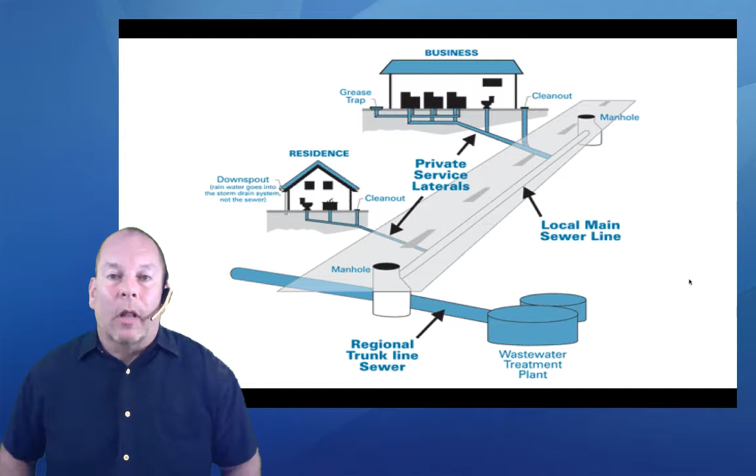So with that in mind, let's go ahead and jump in. I'm going to use a few terms today, and I want to make sure we're all on the same page with how I use those terms.

If you have a sewer overflow out of a manhole or similar structure in your collection system, there is a federal prohibition against the discharge of any volume of untreated or partially treated sewage. So if we have an SSO, regardless of volume, we have to report it to the state, and we run the risk of some regulatory liability.

Now, similarly, if we have a problem in our collection system and it results in a backup into a home or business or other types of private property, again, this is a violation of the Clean Water Act. This is an SSO, and we need to report it to the state. So once again, we have some regulatory liability.

Now, what makes sewer backups different, though, is if you damage private property as a result of a sewer backup, you're going to be facing some civil liability. You're going to be looking down the wrong end of an insurance claim. So for sewer backups, we face both regulatory and civil liability, and for the run-of-the-mill SSOs that don't impact private property, we still have to be aware of the regulatory liability that carries.

Now, sewer overflows and backups, they differ in where they come out, but they do share a few things in common, primarily the potential to cost a lot of money. And by the way, the photo on the right, that is a pump station, and the water you see pooled on the ground, that is not rainwater.

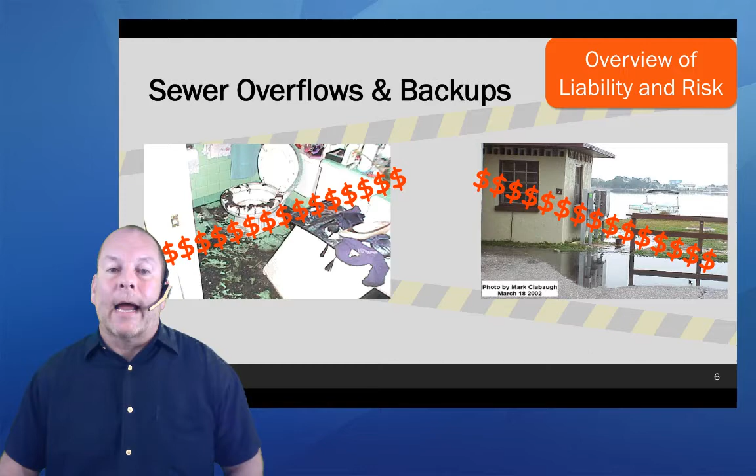Now, when you ask yourself who might be interested in an incident like that, the usual players come to mind: the regional board, perhaps the state water board, Fish and Wildlife, county environmental health. But there are some other groups that we need to be aware of as well that are keenly interested in our sewer overflows and our sewer backups.

And in particular, if you look in the background of that photo, you're going to see some businesses on that body of water. Now, it's safe to assume those businesses cater to tourists. And if we have a sewage spill impacting that surface water body, we're going to be posting signs. And these signs could theoretically drive the tourists away. And those businesses catering to tourists are not going to be very happy with us.

And it's not uncommon for businesses to file a claim against your organization under a theory called business interruption expenses. In other words, you cost them business, and they're going to file a claim against you to try to recover the lost revenue. Now, in addition to private interested parties, we also have to be aware that our sewer overflows and backups, these are very good news stories.

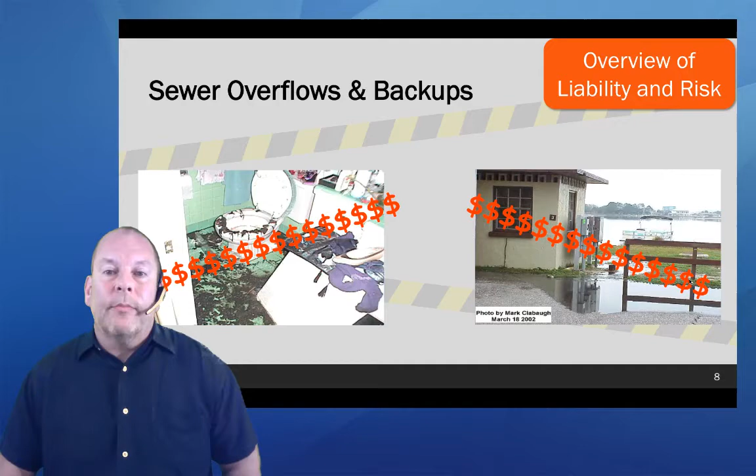Now that raises the question: how do private environmental groups get the ability to sue you for your sewer spills? We need to look to the Federal Clean Water Act. As I mentioned before, there is a prohibition against the discharge of untreated and partially treated sewage of any volume. In the Clean Water Act, there is a provision known as the citizen suit provision, and in a nutshell, the way it works is this.

Now, in Northern California, we have a couple of groups that are very active. Baykeeper gets a lot of press, but there is an organization based out of Northern California that over the past several years has proven themselves to be very litigious: Riverwatch. This organization is based out of Northern California, but they currently have active litigation going on against cities and special districts in Southern California, as far south as San Diego as well.

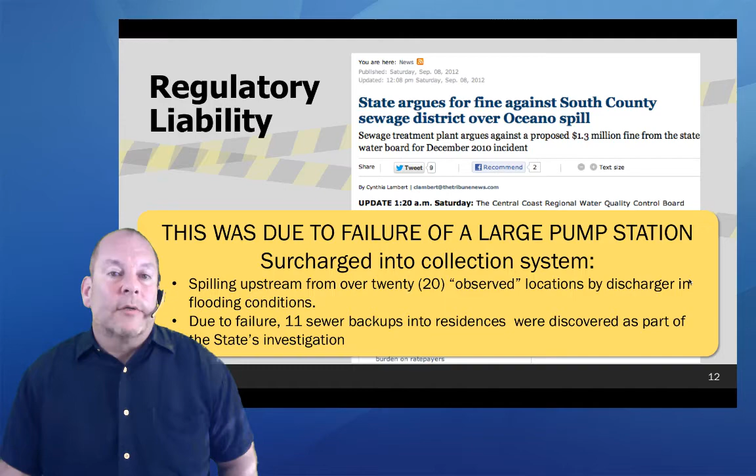And they surcharged their collection system. They had 20 observed SSOs, and they flooded 11 homes. This was what you might consider a very bad day for them. Now, this got the attention of the regional board as well as the state water board. And the district, as their defense, raised the act of God defense, that this storm was so big, so bad, there was nothing the district could have done to prepare for it.

And this gives us great insight into the thinking of the Office of Enforcement on the act of God defense. In this quote, we see that the senior staff counsel for the State Water Board's Office of Enforcement argued that the district had years to properly budget funds for projects to address known problems. As a direct quote, delayed maintenance issues are not acts of God. There were several unresolved issues that were known about and should have been repaired prior to the spill. So the act of God defense in this particular case did not work, and enforcement proceeded.

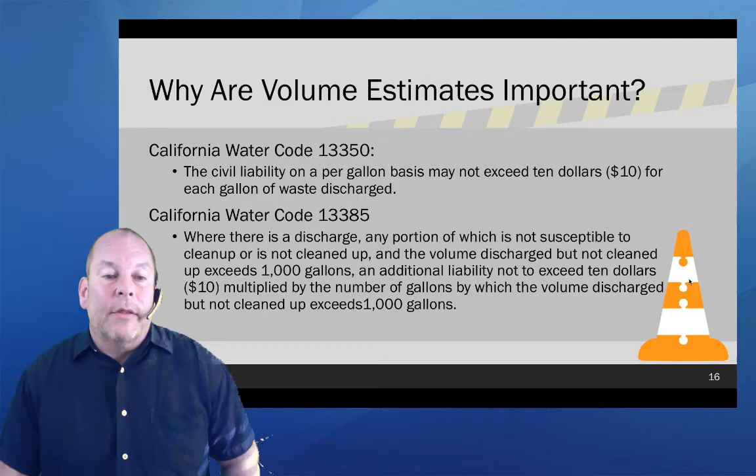The other thing to keep in mind if enforcement action is going to be taken against us, in addition to economic advantage, is SSO volume spilled. There are two places in the California Water Code that assign a dollar value of $10 per gallon of untreated or partially treated sewage spilled. Hopefully, in negotiations with enforcement staff, you can negotiate downward, but nevertheless, we are facing $10 per gallon right out of the gate.

This underscores the importance of having defensible volume estimates, as this particular case study illustrates. Enforcement action proceeded against this district, and at the end of the day, the State Water Board and the Central Coast Regional Board levied a fine against the district of $1.1 million. In the grand scheme of things, not a tremendous amount of money, but in terms of their annual operating budget, this accounts for a little more than 50%. This was a hefty fine, and it really hurt.

The key issue in this enforcement action was vast differences in the estimated volumes of the spill between the State Water Board engineers and the district. The district had reported to the state they spilled 400,000 gallons. The State Water Board engineers, however, through their calculations, estimated the volume was closer to 3 million gallons. Again, at $10 per gallon, we're talking serious differences in dollars. This underscores the need to have defensible, documented SSO volume estimates.

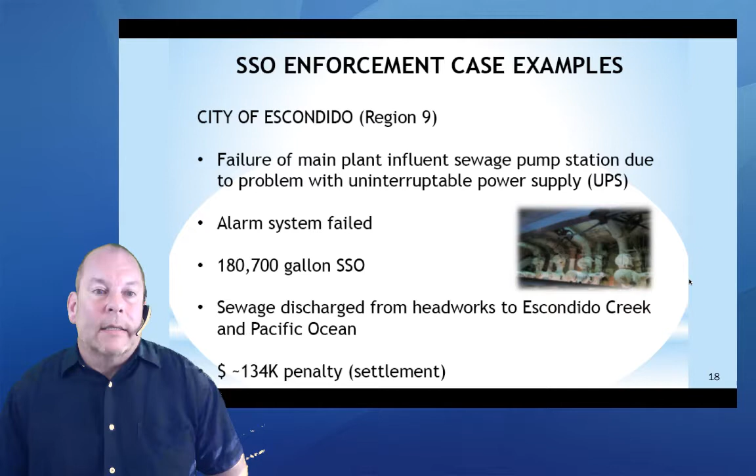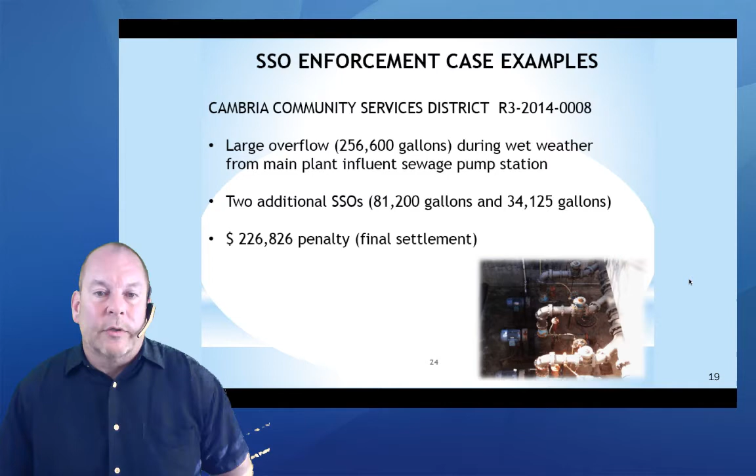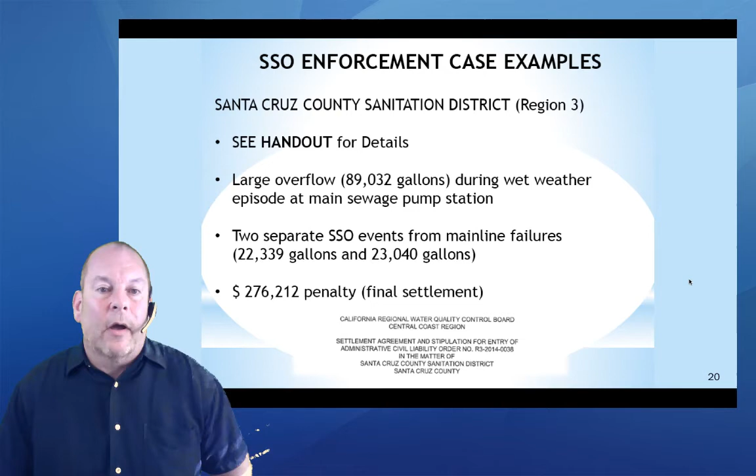Now let's go into a few SSO enforcement case examples that directly involved failed pump stations. City of Escondido: failure of a main plant influent pump station, $134,000 penalty. Cambria Community Services District: overflow of 257,000 gallons, again due to failure of an influent plant sewage pump station, $227,000 penalty. Santa Cruz County Sanitation District: 89,000 gallons spilled, again due to failure of a large sewer pump station, $276,000 fine. Costa Mesa Sanitary District: a $416,000 penalty assessed, and again this involved failed pump stations.

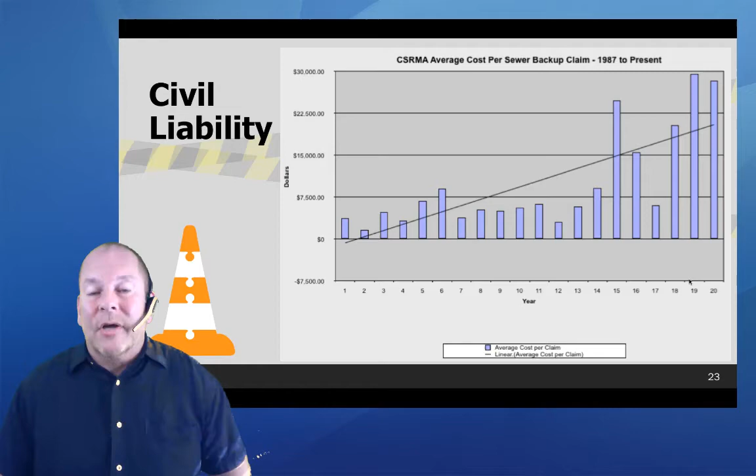So let's switch gears from regulatory liability and hit some key issues on civil liability real quick before getting into what we need to start thinking about in emergency planning for our pump stations. This is the average cost of a sewer backup impacting a single-family home in California. Don't get too hung up on the numbers. The takeaway is that about 25 years ago, the average cost was running around $4,000 per incident. The average cost now statewide is running closer to $26,000 to $27,000 a hit. There are a lot of reasons for this that I'm not going to get into today. The takeaway is simply that they cost a lot of money.

In this particular case, we had a sub-regional pump station, a very large pump station that failed one night due to a large storm and a power outage. While this pump station was equipped with a backup generator on site, the computer controller for the generator failed, and as a result the pump station was non-operational. In this incident, we had over 100 homes and businesses impacted by this failed pump station. The potential loss exposure, in other words the potential dollar value of all of those damaged homes and businesses, was pegged at $70 million.

As you can see, when a pump station fails, depending where it is and what it serves, it can result in some really significant damages, both to private property and your customers, as well as in real dollars. In this particular case, there ended up to be 265 plaintiffs, representing over 100 damaged homes and businesses.

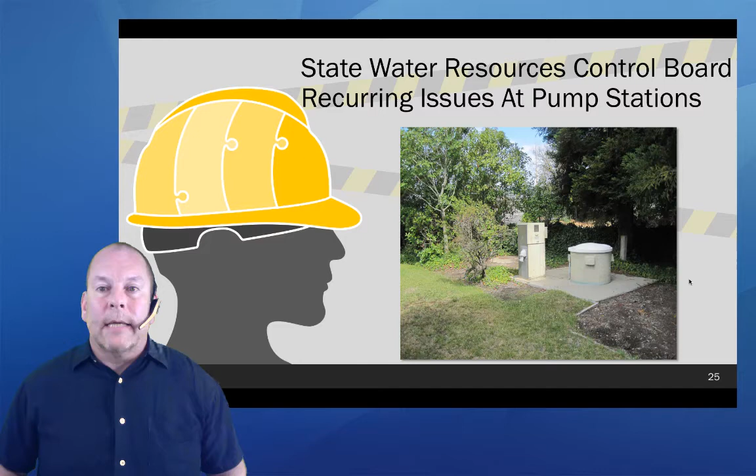Let's talk about what the State Water Board enforcement personnel keep seeing during their SSMP audits related to pump stations. Hopefully we can take away some lessons here and make sure we've got our ducks in a row before the State Water Board visits us and finds the same things.

Something to keep in mind is during an SSMP audit, your pump stations are almost always going to get a visit. These are structures that the State Water Board is very interested in. If you want to see completed actual SSMP inspection reports, you can find them on the State Water Board's website, or email Jim Fischer at the Water Boards. He welcomes your emails, and he looks at this as an opportunity for everyone to learn.

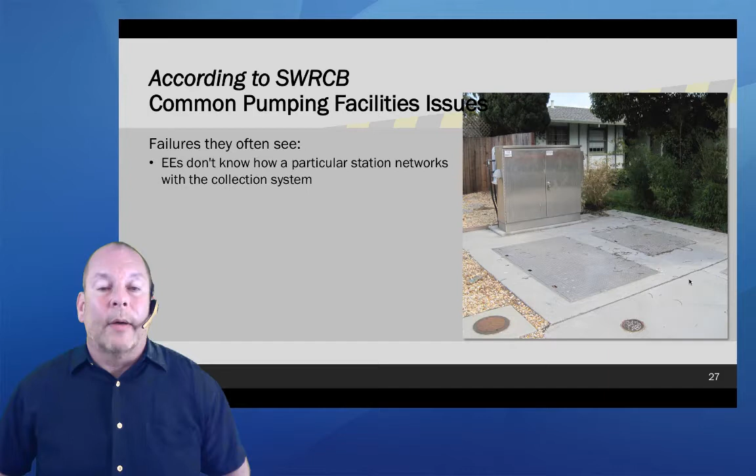So some common pump station issues that they see: employees don't know how a particular station networks with the surrounding collection system. As we all know, this is very important because we can use our system as a holding basin, if we will, when we have a pump station fail, to buy us time before we actually see an overflow.

Also, access to critical replacement parts, emergency repair resources, whether or not an agency has the adequate resources to respond to a station failure. Knowledge of the local low point, or in other words, when a pump station fails, where in your system is it actually going to overflow, so that we can get out there ahead of time.

And related to that, once we know where a station is going to overflow, the State Water Board wants to make sure that your staff is aware of where all the local storm structures are, so they can get there and protect them, hopefully, before they're impacted, or at least mitigate the impacts should they arrive after the fact.

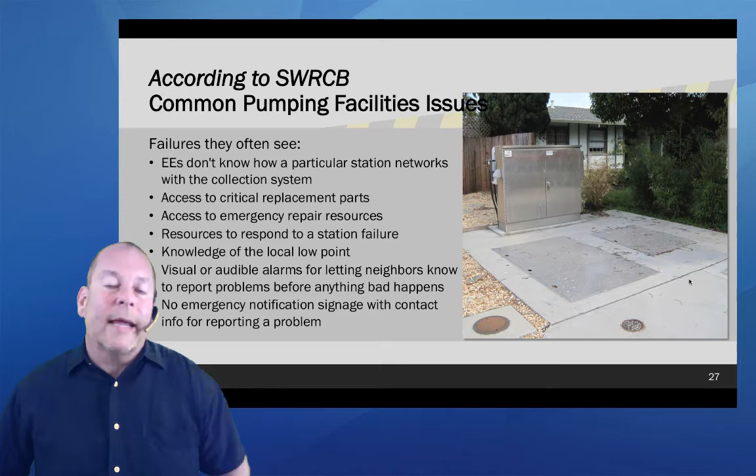Another thing that the State Water Board is keen on is making sure that pump stations are equipped with signage or other form of alarms that will notify surrounding neighbors, if that is applicable, so that they can alert you when problems come up. So let's address a few of these issues.

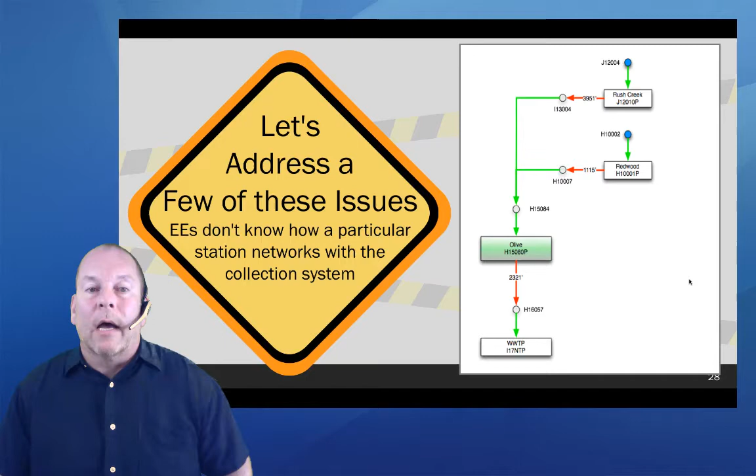First and foremost, employees don't know how a particular station networks with the surrounding collection system. What you see here is a line diagram from a sample pump station emergency response plan. We got rid of all of the sewer lines, and now what we're just showing are the pump stations and the direction of flow. This allows an employee to quickly determine where they can go in their collection system to shut off pumps and start using holding times in our wet wells to buy us time to deal with the failed pump station.

More on that later. Access to emergency repair resources: if you have already identified which vendors have the resources and expertise to help you out should it become necessary, make sure it's written down and your employees have access to that and know how to obtain those resources under emergency circumstances.

Next, having visual or audible alarms to let neighbors know to report problems, and emergency signage. It's a simple matter to make sure that we have visible signs with a phone number for neighbors to alert us when they notice a problem, whether it's vandalism or just something not right.

In this particular case, CSRMA has actually had a couple of claims in the past 3 years where the high-level alarms on a pump station failed. And so the agency was not aware of a problem at the pump station. They only became aware when neighbors noticed something wasn't right, and they notified the agency.

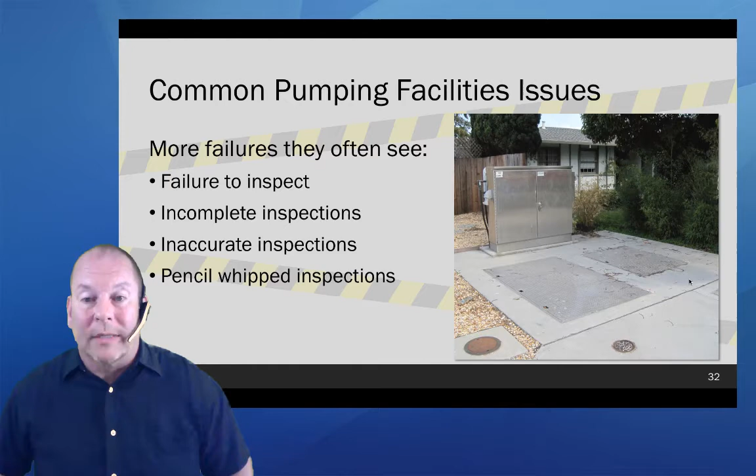Incomplete inspections, inaccurate inspections, and pencil-whipped inspections. Let's talk a little bit more about that. First, the State Water Board does not like seeing pencil-whipped inspections, just like the CHP for your heavy vehicles. They want to see documentation that indicates whoever performed the inspection took it seriously.

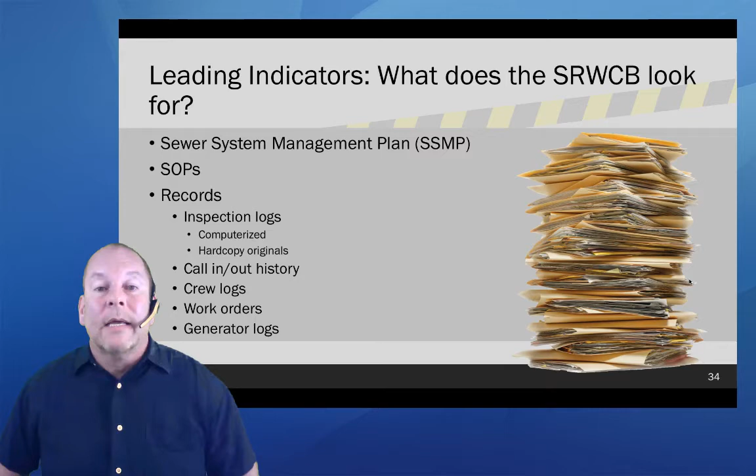Additionally, what does the State Water Board like to look at in addition to your pump stations? Well, obviously they're going to take a look at your SSMP, but they're also going to be asking for your standard operating procedures. More on that as we go forward. Also, records, inspection logs, whether they're computerized, and your hard copy originals. Call in, call out history, crew logs, work orders, generator logs. This is just a sampling of some of the documentation they'll be looking for.

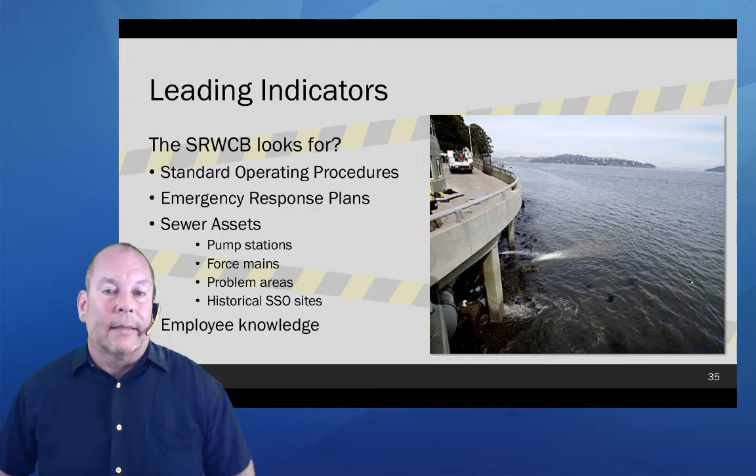Let's talk a little bit more about what the State Water Board is looking for in standard operating procedures as well as your emergency response plans. They're going to be looking for evidence of routine wet well inspection and maintenance.

The State Water Board staff like to relay a story where they were conducting an inspection. They were at a pump station, and they asked the staff member who was escorting them how often they open the wet well and take a look. Staff indicated, oh, we do this every time we're out here. The State Water Board staff was very pleased to hear this, and when they asked staff to open up the wet well so they could take a look, the bolts holding the hatch to the wet well in place had rusted in place and they couldn't get it open.

This, as you might imagine, caused the State Water Board staff to lose faith and the agency staff to lose credibility. So when we are doing our pump station inspections, in particular with the wet wells, here's a tip: take photos, and if they're date and time stamped, even better. This provides the State Water Board staff evidence that we are in fact looking at these things, and it also gives your organization an opportunity to see subtle changes that are occurring over time that an employee may miss from week to week.

Now, they will also be asking your staff lots of questions to test their knowledge of your standard operating procedures, your maintenance procedures, and your emergency response procedures. The questions that they're going to be asked aren't a big secret. The State Water Board, as well as the CWEA, put out a list of the common questions you can expect the State Water Board staff to be asking your staff during an SSMP audit. If you'd like a copy of this, please drop me an email at the conclusion of today's webinar.

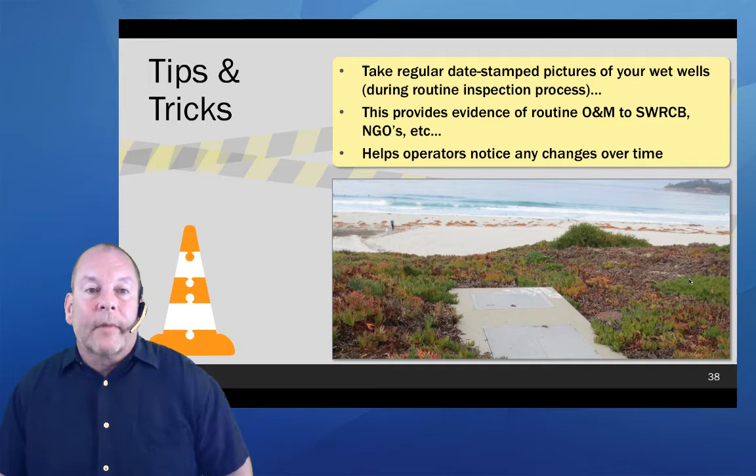So here's some tips and tricks. We already talked about taking regular date stamped time pictures of your wet wells during your routine inspections, and also with your SOPs. Another tip: make sure, one, you have them, and two, make sure they're in an area where your employees have access to them where they would need them.

If you have wonderful, beautiful SOPs that live in binders on a shelf back at the main office, but where staff would really need to be referring to them is at a pump station, get a copy out to the pump station. This is something the State Water Board likes to see.

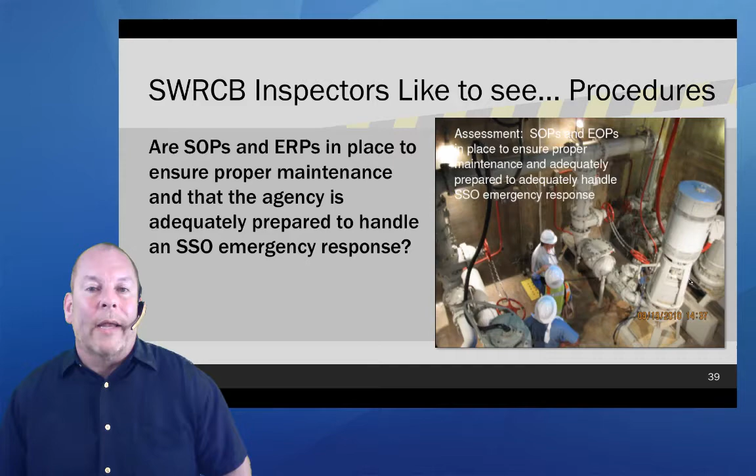So the State Water Board will be looking for your SOPs and emergency response plans in place to make sure you have them, but also that they're available and accessible to your employees when and where they would likely need them. Now this brings up a question.

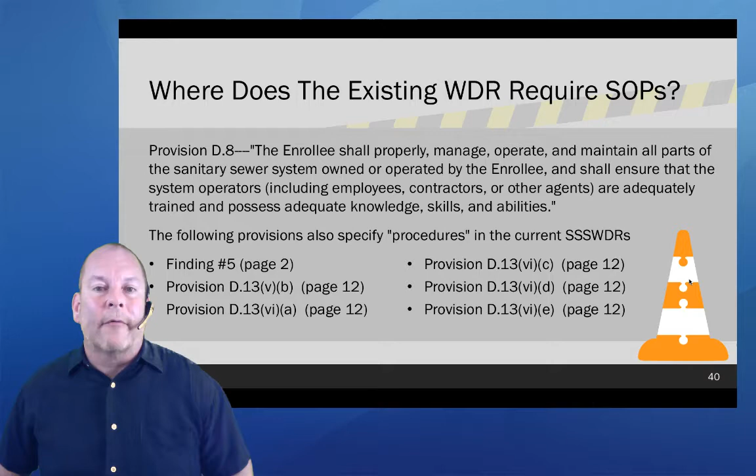Where does the existing waste discharge requirement, the order where we get the SSMP requirements, where does it require us to have SOPs? Well, when this question was posed to the State Water Board Office of Enforcement, this was their response: they use provision D8 in the order as their interpretation of requiring SOPs. This is where during an SSMP audit, they will use section D8 to ding dischargers for failure to have the necessary standard operating procedures. Now, standard operating procedures, as we know, all of them are not created equal.

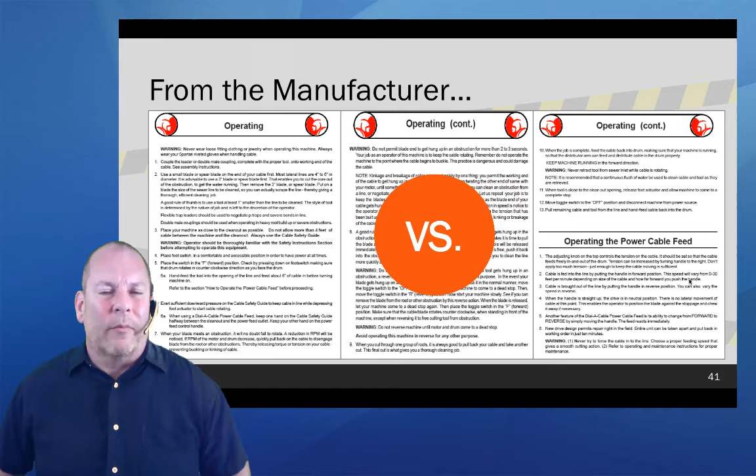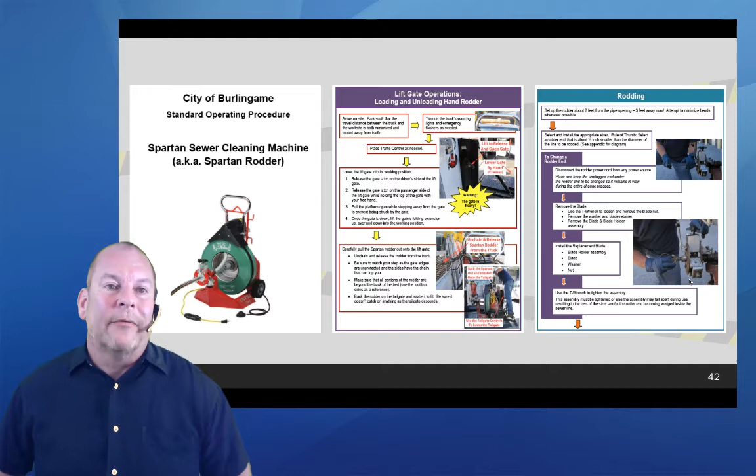So what Burlingame decided to do was develop their own operating SOP for how they wanted the Spartan sewer cleaning machine operated at the City of Burlingame. What they did is put together a photo-based SOP that's very easy to follow, and as we all know, a picture is worth a thousand words. This is zip tied to the unit, so you cannot take the unit out to the field without bringing the SOP along with it. This makes sure the SOP is conveniently accessible to employees when and where they would need it the most.

Over the past several years, especially during the recession when we saw a lot of folks retiring, a lot of organizations started getting their SOPs written. Not only for regulatory reasons, but with retirements, a lot of institutional knowledge was perhaps walking out the door. In many cases, organizations wanted to capture that knowledge so they would have a tool to train new employees and a standard to which they could hold employees accountable going forward.

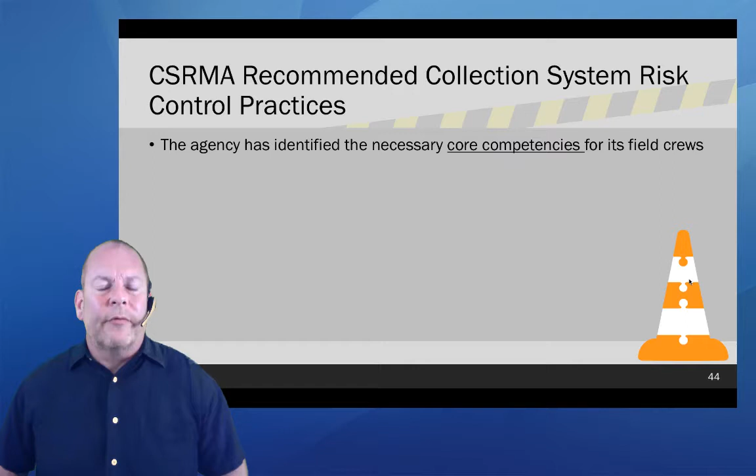Now, CSRMA, let's talk a little bit about what they recommend, because it ties directly in with the State Water Board's expectations, in particular for SOPs. One of the things CSRMA recommends to all of their members is that you've identified the necessary core competencies for your staff. What do they need to know to be successful at their job? It's going to be different for every agency, but we do have some commonalities. We all do line cleaning, perhaps point repair, bypass pumping, etc.

Once you've identified all the necessary core competencies, the things your employees must know how to do, these things become important enough to have written SOPs behind them. If it's important enough to be a core competency, we need to have a written SOP, not only for training, but also to be able to determine what good looks like, what success looks like.

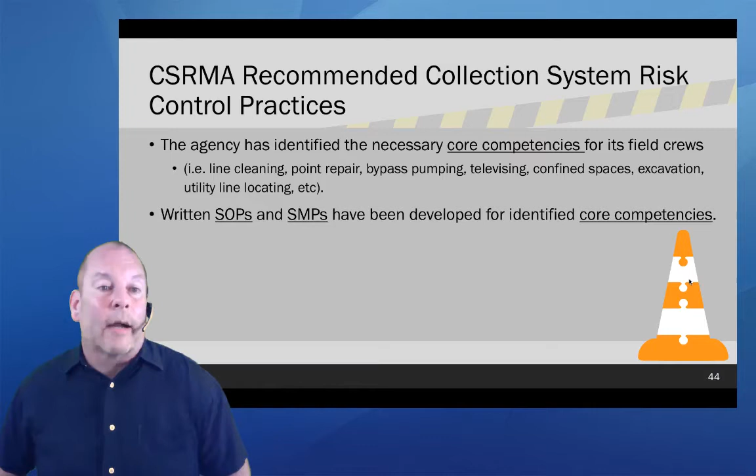In the absence of an SOP, employees are left to figure it out on their own or make up their own way of doing things, or it's going to be the judgment of whatever supervisor happens to be supervising that work activity today, this week, this month, this year. SOPs establish, as the name implies, a standard.

CSRMA also recommends to their members that you have a documented and ongoing employee training and proficiency testing program, just to combat something known as procedural drift. Bad habits always creep into our work habits - that's just part of being human. This has been long recognized by the U.S. military, as well as high-risk industries such as medicine and nuclear power and chemical manufacturing.

Humans will always try to find the better, easier, faster way of doing things. Oftentimes this means altering an established standard way of doing things. Making sure everyone's singing from the same page in the choir book from time to time helps combat procedural drift. If there is a better way to do it, update your SOP. But if it's a standard, we need to stick to our standard operating procedures in order to avoid error and problems.

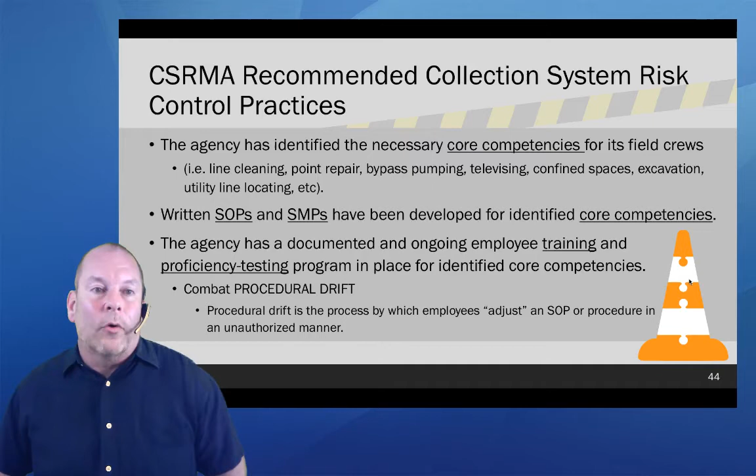So why does CSRMA put so much emphasis on this? Well, it's because human error is the single largest cause of things going wrong, and human error can do lots and lots of bad things. Core competencies, SOPs, training and testing is the easiest error reduction strategy to implement.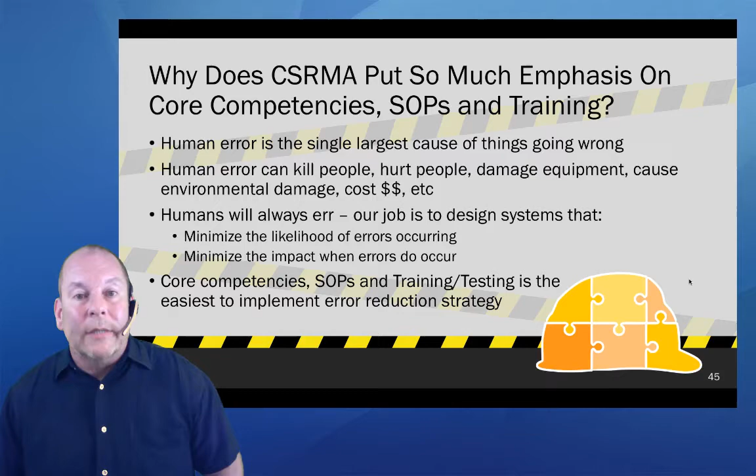CSRMA didn't figure that out - we can tie this back to lessons the U.S. military has known since the 1920s. We've just adopted that belief, and it's very, very effective.

Now, if you are curious about the role human error plays in things going wrong, go to Google News and type in the search terms 'human error' and 'accident'. On the day I did it, I got 39,000 news stories that day on the internet about accidents being attributed to human error. This is where things are going to go wrong.

But we have to remember, human error doesn't have a value judgment. Human error means we didn't recognize we were doing something incorrectly until after the fact - that's why it's called human error. If we knew ahead of time we were deliberately violating our rules, policies, and procedures, that's not human error. That's a violation.

We need to understand the difference between human error and deliberate violations, because human error is where we're going to have problems when we ask our employees to respond in an emergency fashion to a set of circumstances they don't do all the time. That is the most error-prone type of activity.

So here's a quiz for you. Which is easier to change? The conditions or systems under which people work, or human nature? Hopefully we all answered the first one, because I don't think in any of our lifetimes we're going to engineer out human error from human nature. So we need to understand human error is always going to happen. Our job is to reduce the likelihood of occurrence and reduce the impact when it does occur.

This has a direct bearing on how we write our standard operating procedures and how we write our pump station emergency response plans.

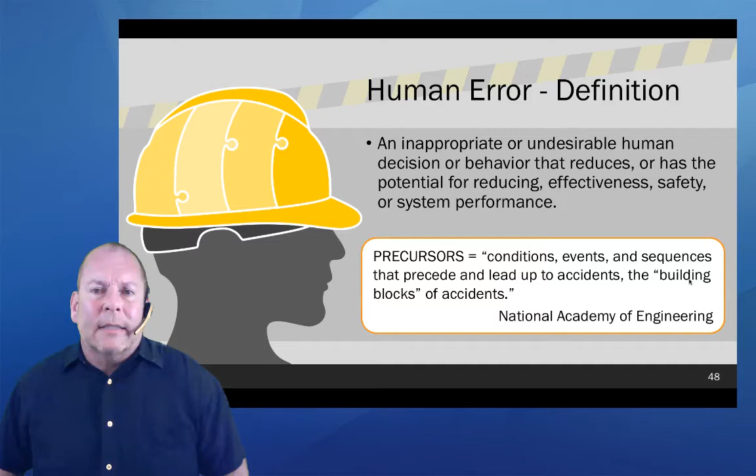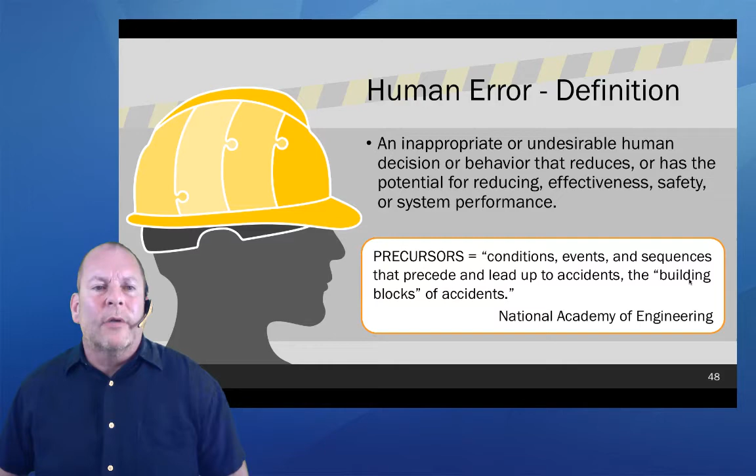So I talked about human error. If you'd like a definition, here's the one that I like the best. But something interesting about human error is it doesn't just happen. According to the research that's been done over the past 100 years or so, human error always has precursors. Things will contribute or trigger someone to make a mistake or an error, and we can identify those things.

Here is a short list. This is actually an error precursor list that a chemical manufacturer here in the San Francisco Bay Area uses. Whenever they buy a new piece of equipment, put it in service, or write or alter a standard operating procedure, they go through this error precursor list. If you work at a chemical manufacturer, they don't have a lot of margin for error. They need to make sure things go right every time.

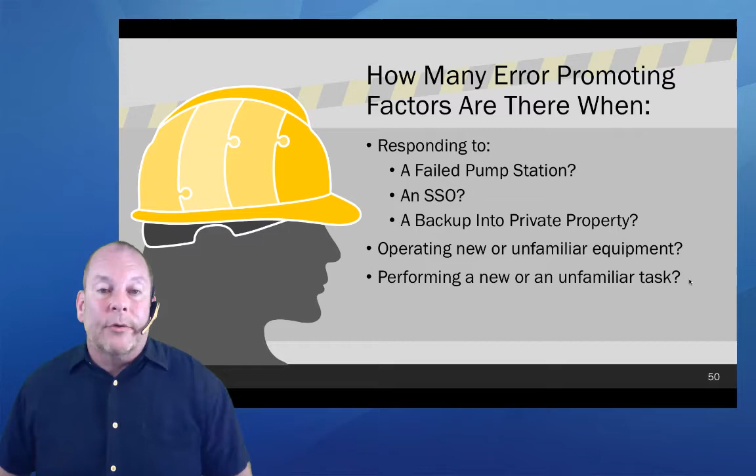And we can do the same thing. When we ask ourselves how many error-promoting factors there are when our staff responds to a failed pump station, an SSO, a backup into private property, or any of the other situations, we can apply this same list. I'd argue that if we're responding to a failed pump station, our staff is working under a lot of time pressure. They're probably juggling a lot of different things, and if they make a mistake, it could be irrecoverable.

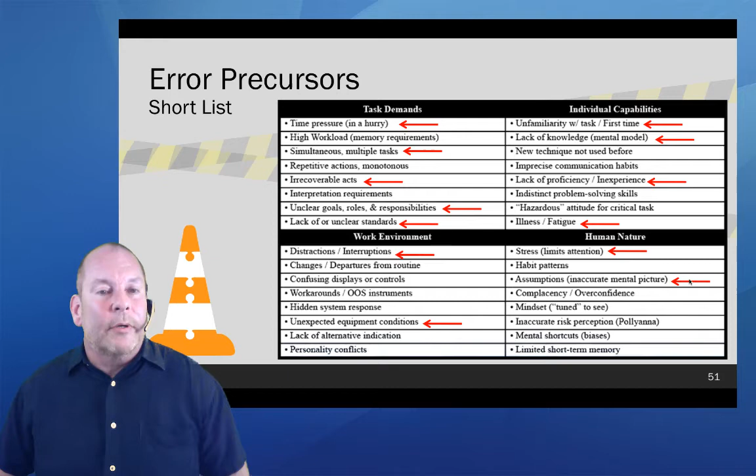It could damage equipment, it could make the SSO worse, or worse yet, someone could get hurt. And if we don't have a written emergency response plan for how we are expected to respond to a failed pump station, we are going to have unclear or just plain lack of standards—what am I supposed to do here? We can go on and on through this list. So as we can see, with pump station emergency response plans, we need to put some thought into how we write them if we expect them to be useful when we need them most.

So with that in mind, here are the basic levels of human performance. We need to keep this in mind because it's going to make our SOPs and emergency response plans better. Humans basically have three levels of performance, and this isn't anything new: skill-based behavior, rule-based behavior, and knowledge-based behavior.

Skill-based behavior is those behaviors you can do in your sleep—you've done it so many times you can carry a conversation while performing that task. A good example: if you can tie your shoes while holding a conversation, congratulations, tying your shoes is a skill-based behavior for you. Now, rule-based behavior is less error-prone than knowledge-based, but more than skill-based, which is the least error-prone. Nevertheless, rule-based behavior has some problems if the rules I'm applying are incorrect. More on that as we go forward.

But here's the one we need to focus on: knowledge-based behavior. This is when we're doing something for the first time, or haven't done it very often. When we're doing it, we actually have to operate very, very slowly and figure out solutions on the fly. This is the most error-prone of all behaviors. The error rate that's been calculated for anyone performing a task in the knowledge-based realm is 50-50.

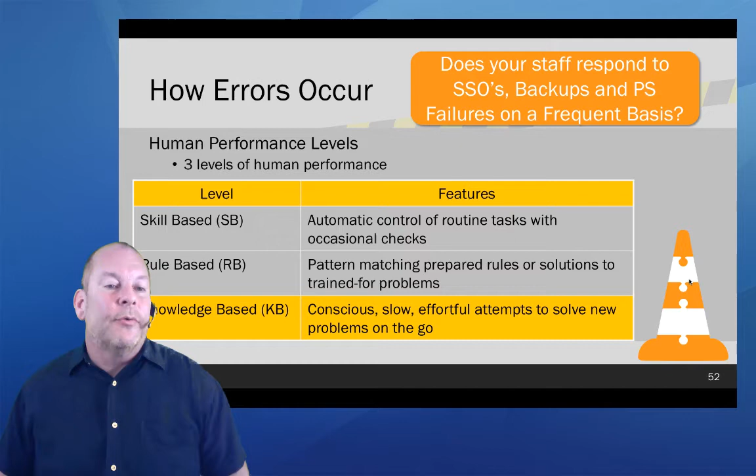Our job is to make sure our SOPs and our emergency response plans move our employees out of the knowledge-based realm and into the rule-based realm, which is less error-prone. More on that as we go forward.

So here's the question hopefully everyone's asking right now: what risk control system do we have in place to make sure each response goes as planned, whether it's an SSO, a sewer backup, or responding to a failed pump station?

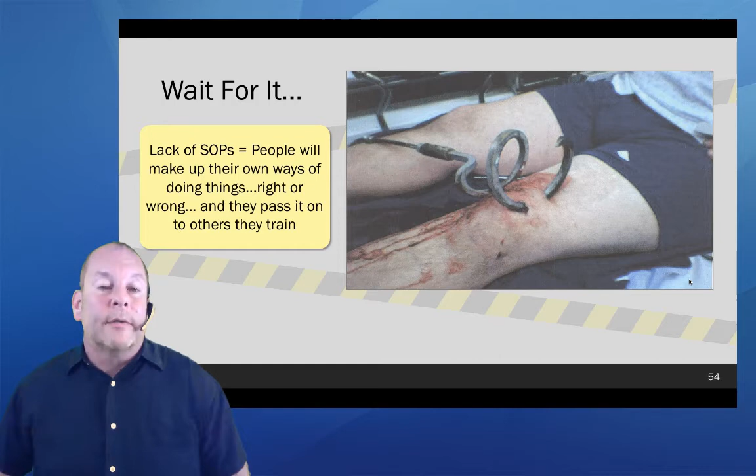The accident investigation revealed that the organization didn't have an SOP for how to operate their continuous rodder. In this particular case, it resulted in all of their operators operating the equipment differently, and this had a direct bearing on this particular accident.

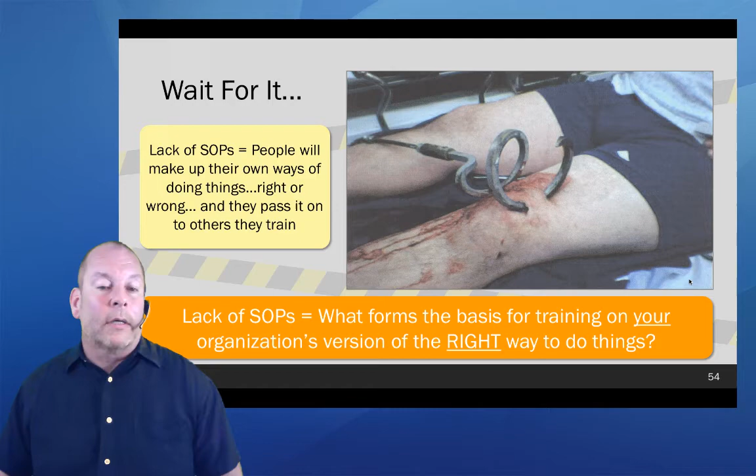The takeaway is simply this: without SOPs, what forms the basis for training in your organization on the right way to do things? So this goes right back to the State Water Board.

If you haven't seen their Pre-SSMP Audit Questionnaire, I highly encourage you to get a copy. If you'd like the most current version, either contact the Office of Enforcement or drop me an email. I'll be happy to send it over to you.

In Section 11 of this Pre-SSMP Audit Questionnaire, Collection Staffing and Training, questions are asked: does your agency have a program in place to identify and document the core competencies, and does it identify gaps in competencies and capabilities? In other words, do you do some periodic proficiency testing?

This sounds remarkably similar to what CSRMA recommends to their members as well. The State Water Board is asking for this for the same reason CSRMA does: it reduces the opportunity for errors to be introduced into how we operate our collection system, and it helps guarantee better and more reliable operation.

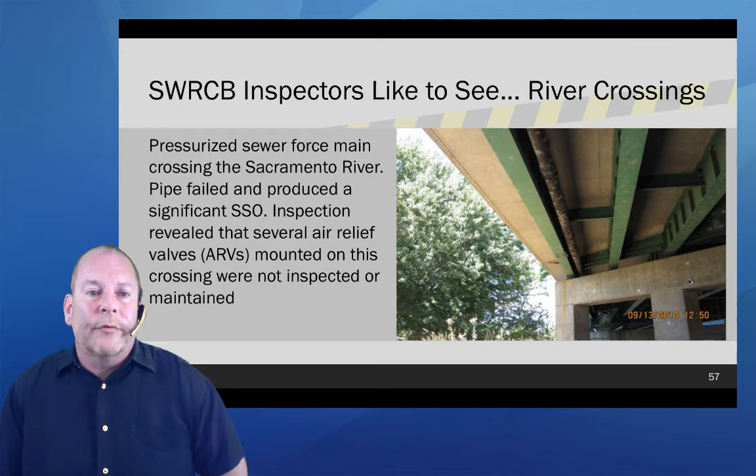So back to the State Water Board SSMP audits. What else do the State Water Board inspectors like to see? If you have any overcrossings or undercrossings for rivers, creeks, and streams, they will likely want to see those. They will also likely want to visit previous SSO locations, and they will take a look at your sewer equipment and vehicles, as well as any main lines, laterals, and manholes that are of interest to them.

They'll be taking a look at your SSO emergency response equipment. And as we talked about, they will be interviewing your staff, testing their knowledge, experience, and understanding of your organization's emergency response plans and standard operating procedures.

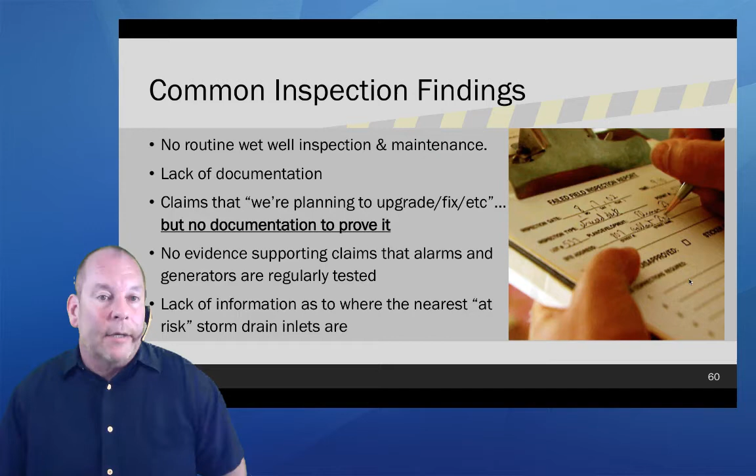As we pointed out, one of the areas that they commonly find agencies lacking is documentation. We've all heard the phrase, if it wasn't documented, it didn't happen. We need to make sure that our documentation rises to the level of professionalism the State Water Board is expecting.

They will also talk to your operators during an inspection and take a look at your inspection checklist for your pump stations. Those inspection checklists need to show more than just pump run times and things like that. They want to see things in place to help guarantee reliable operation of that asset. For example, if you have security lighting to ward off vandalism, that needs to be on your inspection checklist, so the operator making the rounds will check that the lighting hasn't been broken. Oftentimes vandals will break security lighting ahead of doing whatever they intended to do, and just wait and see how long it takes an organization to notice the lighting was out.

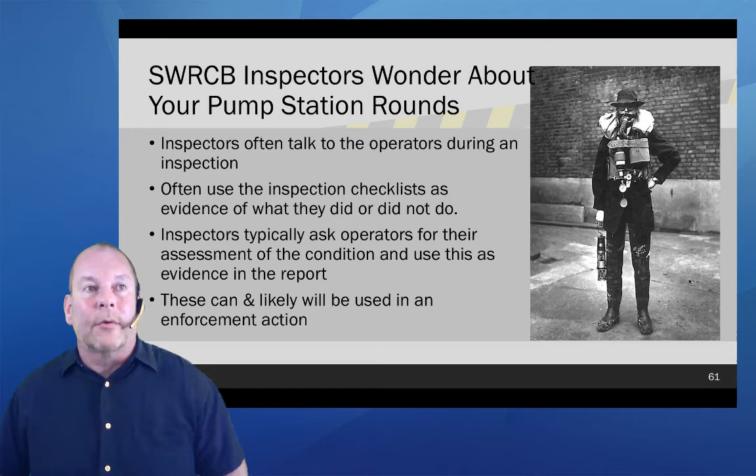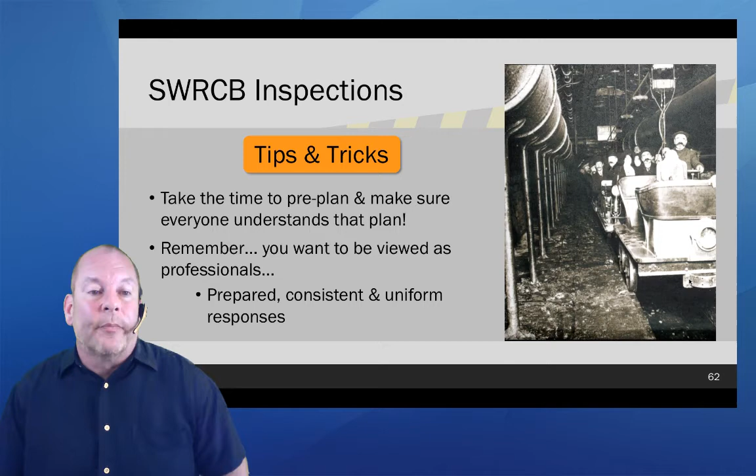So here's some tips and tricks. Take the time to pre-plan, make sure everyone understands your SSMP, where your emergency response procedures are, what is in them, as well as where your SOPs are. This is all designed to make sure that we're viewed as the professionals that we indeed are.

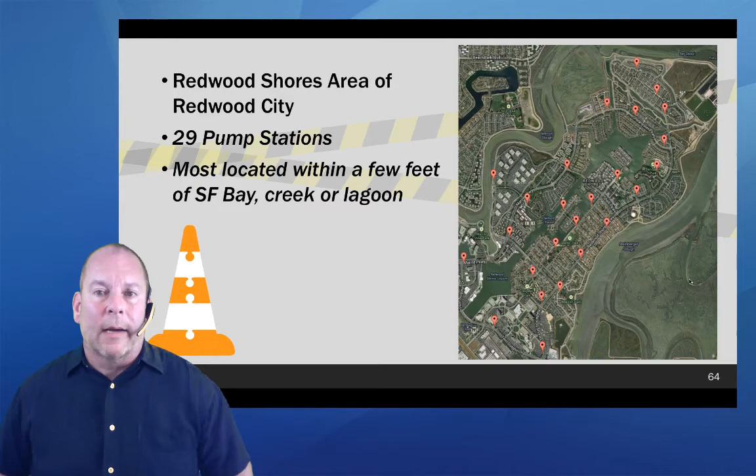Let's move on to taking a look at actual pump station emergency response plans. As a way of introducing this, let's use a case study with Redwood City. A handful of years ago, in their Redwood Shores community, which lies right on the bay, where they have 29 pump stations, most of which are located within a few feet of San Francisco Bay, a creek, or a lagoon, they don't have a whole lot of response time when something goes wrong. They had one of their larger pump stations fail, and they ended up spilling 57,000 gallons into the bay.

In this particular case, the news article interviewing the public works superintendent at the time, it becomes very evident they were very frustrated because they had all the information they needed to effectively and quickly respond to this failed pump station. The problem was the information was scattered in multiple places. This cost them time, and the time that was wasted hunting down the necessary information, the sewage kept spilling.

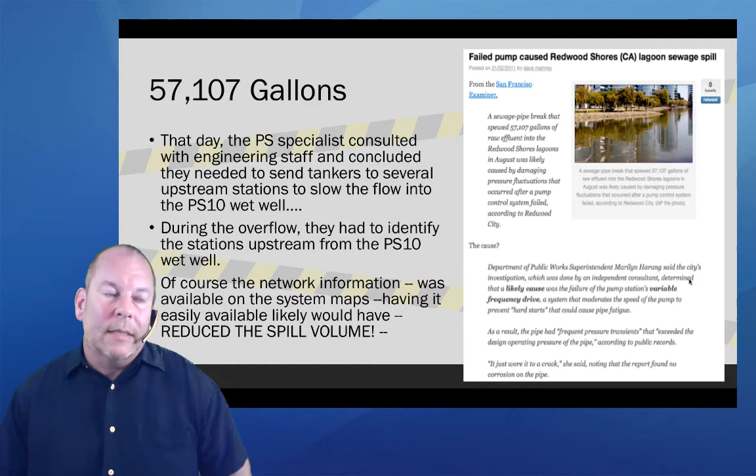So I said it before, and I'll bring it up again. Our goal is to shave minutes off of our response, because the more minutes we can shave off our response, the fewer gallons that end up getting spilled.

At the end of the day, following this event, they put together their emergency response plans for all of their pump stations, and this little line diagram right here would have saved them, in their own estimation, a half hour. This one little line diagram right there. A half hour is a lot of time when we have a pump station spilling.

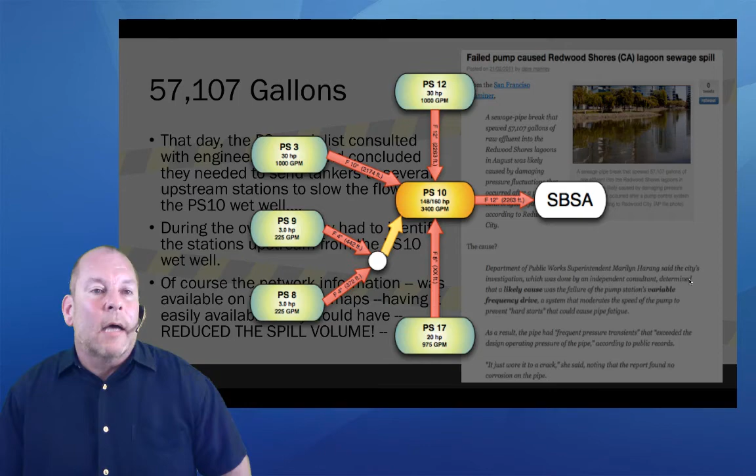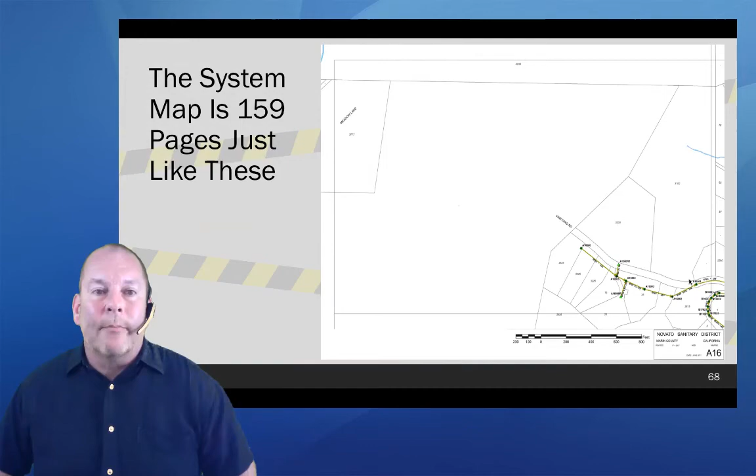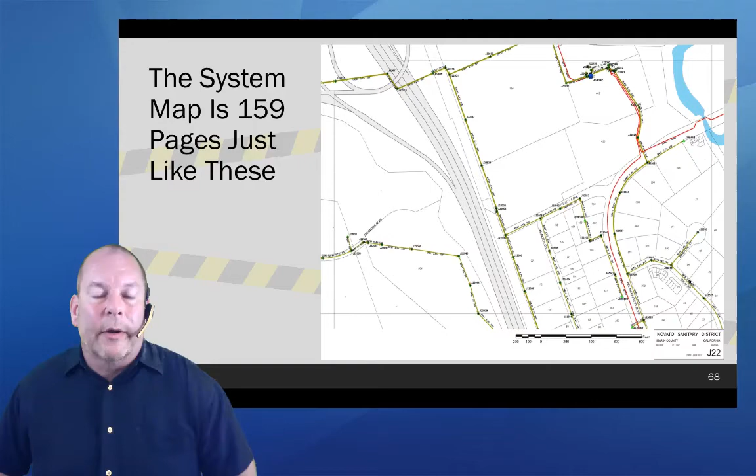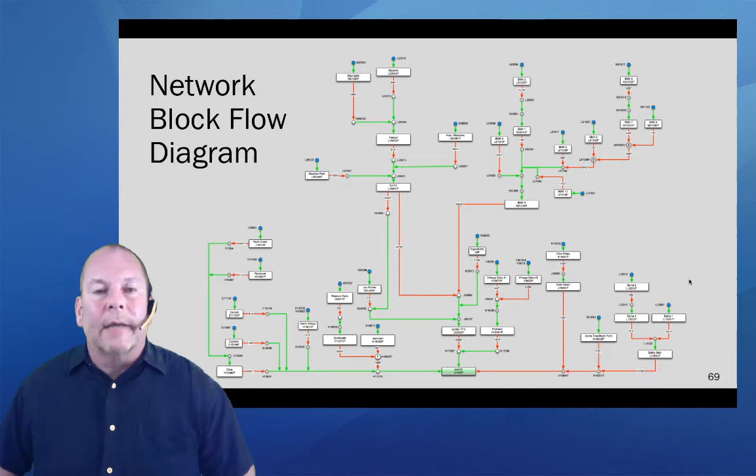And this is the network block flow diagram for all 37 of their pump stations. One page, and it's very clear, showing where everything flows, how everything interacts with each other. And again, it's all designed to shave minutes off of our response.

Now, back to the State Water Board pre-inspection questionnaire. The State Water Board does expect us to have station-specific emergency response plans. In this document, question 9.1: does your agency's SSO emergency response plan incorporate procedures for pump stations and force main sewers? Question 4.19: has your agency developed standard and emergency operating procedures for each asset in the event of a power and/or pumping failure? This clearly indicates the State Water Board does expect us to have emergency response plans that have been tailored and are specific to each of our pump stations. So why do we develop these things?

Well, there's a lot of reasons. The planning process is going to help you identify weaknesses in what equipment you have available, spare parts, backup equipment, maps, available knowledge of your system, and any necessary vendors you may need.

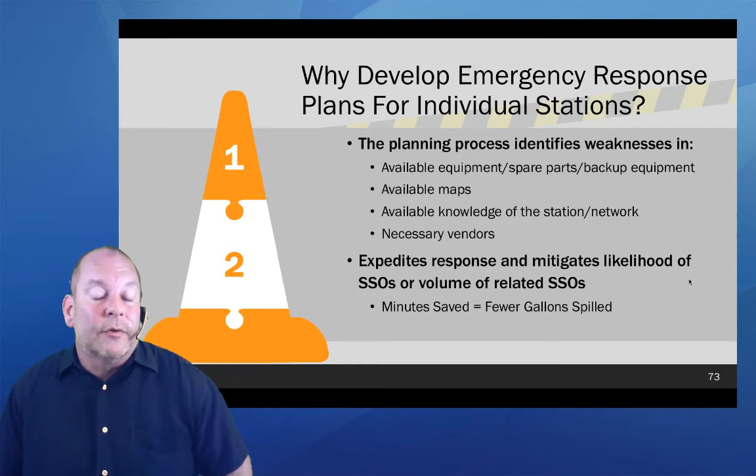Second, it expedites response and mitigates the likelihood of SSOs or the volume spilled. And again, minutes saved equals fewer gallons spilled. And third, it helps build a defense to mitigate liability after the fact.

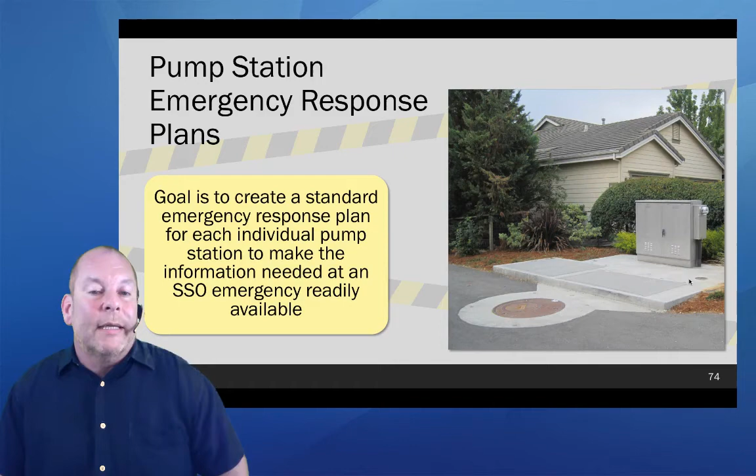So the goal here is to create a standard emergency response plan for each individual pump station and make the information needed at an SSO readily available to your staff. That's our goal here. So what should they address?

Do you have built-in bypass capabilities, or do you need to do a manual bypass? And if so, where are you going to bypass to? How much hose do you need? What size of pump? What size of generator are you going to need? Think about all these things ahead of time.

And any local sewer and storm maps, and in particular the storm maps identifying those inlets. Do you have the necessary equipment to block your storm drain and use it perhaps as a catch system for your SSO, that you can go back afterwards and empty and clean and return to your system?

They also want to see local traffic control SOPs, diagrams if that's relevant. For example, if you have a pump station that has a very small footprint, doesn't have a whole lot of room next to the roadway, so you really got to be accurate where you place your pump or generator if you're going to do a bypass or need to bring in temporary power.

If you don't have a lot of room, little tip: take that equipment out ahead of time, position it exactly where you want it, and either glue down rumble strips or just paint lines so that in the future, if an employee needs to take that equipment out, they can position it correctly the first time. They don't need to get in and out and keep repositioning it. Again, we're trying to shave minutes off of our response.

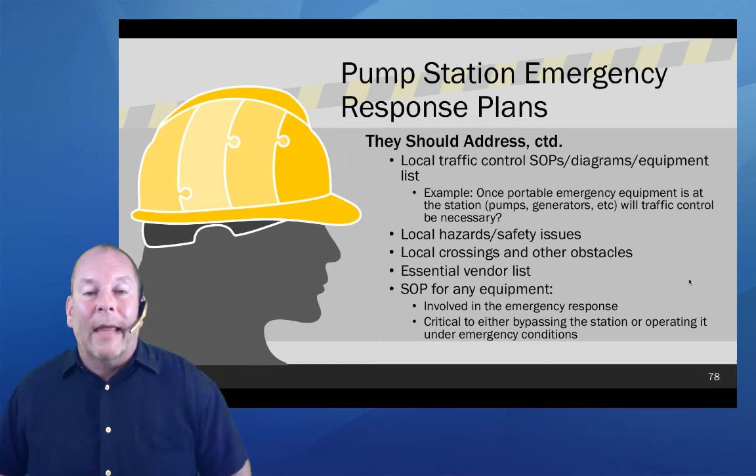Any local hazards, safety issues, local crossings, any other obstacles, SOPs for any equipment that may be necessary to be used in an emergency response that either staff is not going to be familiar with. In particular, if you've got employees who backfill for your sewer collections employees, perhaps your water distribution employees, if they need to have access to SOPs, make sure that they're readily available to them.

The bottom line here, we're trying to save time, trying to find necessary information. We're trying to reduce the likelihood of human error being introduced into our response, because bad things happen. Remember, with knowledge-based behavior, the error rate is 50-50 when we're trying to figure things out on the fly.

Professionalism - we need to keep in mind, how do we want our organization and our employees to be portrayed following a failed pump station that perhaps results in a very large spill. And lastly, it is required as part of your SSMP.

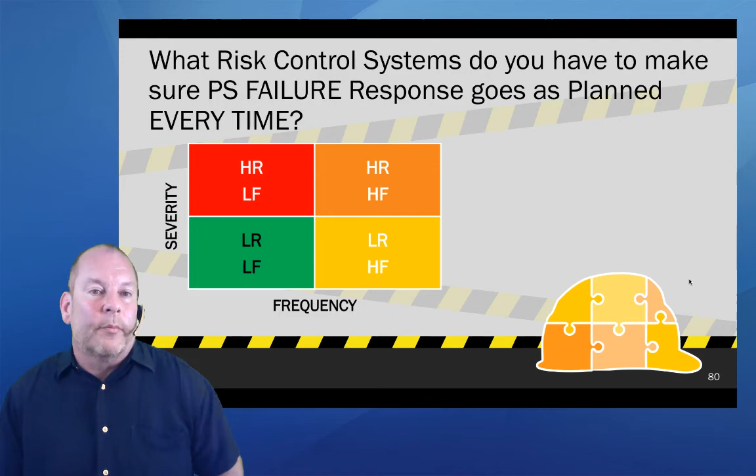So again, we talked about this question before. What risk control systems do we have to make sure our pump station failure response goes as planned every time, regardless of the employees involved? And with that, let's go ahead and take a look at a sample pump station emergency response plan.

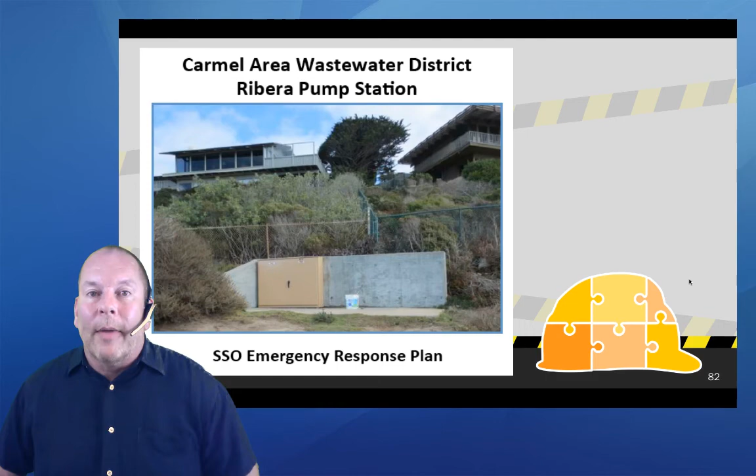This is from Carmel Area Wastewater District. This is their Ribera pump station, which is a stone's throw from Monterey Bay. Monterey Bay is not an area where you want to have a sewage spill.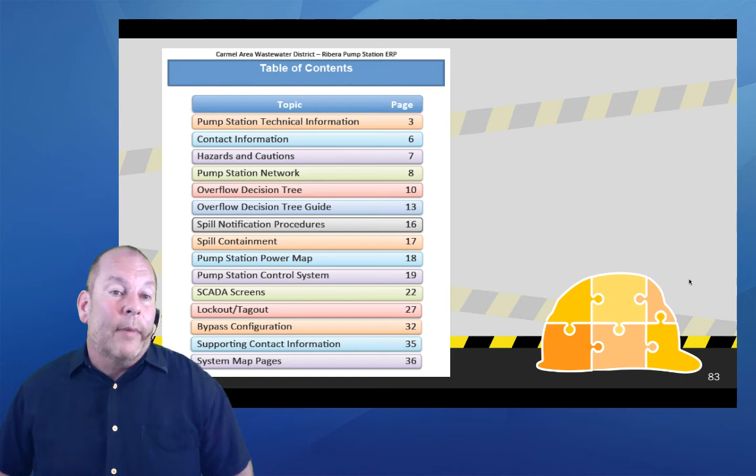Here's the table of contents addressing everything that the State Water Board wanted to see in it, in addition to some information the district said we want to make sure is available to our employees in the field as well. Here's a map of how we get there, along with directions and the lat-long. And here's some technical information about the station - average hold time, wet well capacity, as well as some other technical information.

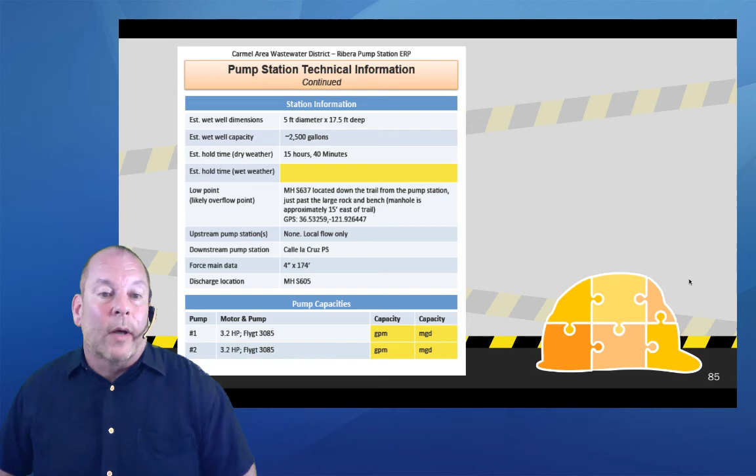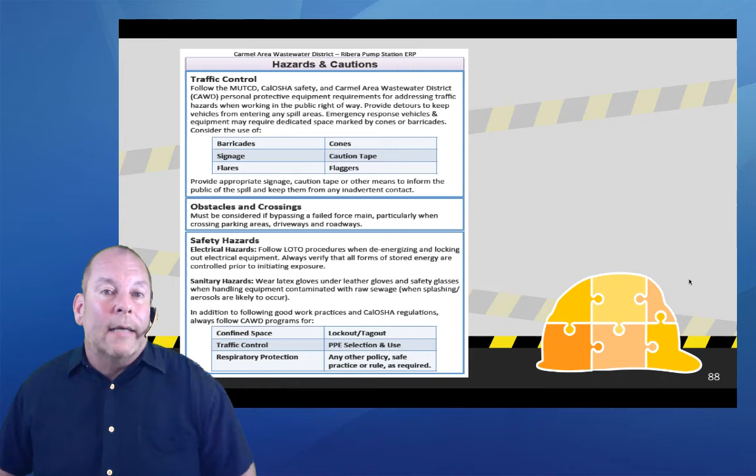The power specs for this particular station, as well as any critical contact information, local hazards and cautions, and the pump station network diagram so that we know how this station interacts with the surrounding system.

And here's our troubleshooting chart. Depending on the agency, we've seen people put these together differently - everyone has their favorite format for putting a troubleshooting chart together. Some people like a table, others like a line diagram like this. But the takeaway is simply this: you and your staff know how your stations are most likely going to fail.

And it's an exercise I encourage all of you to do - get your pump station operators, or those knowledgeable about your pump stations, together in the same room and go through some what-if scenarios. What if we lost power to this station? What if we lost pumping capability? What do we want to do?

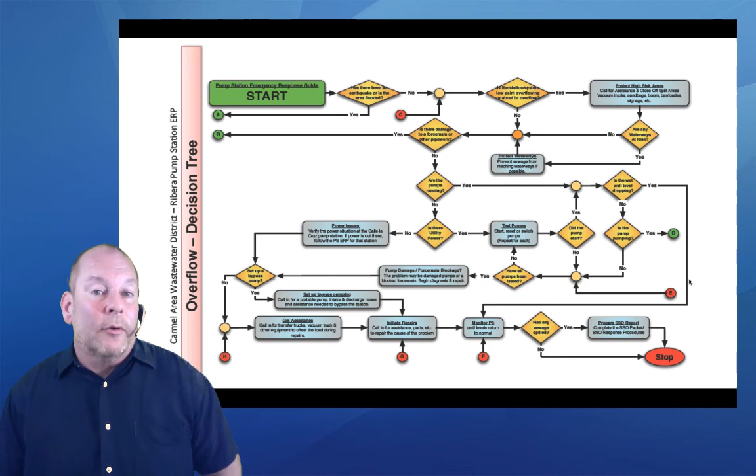What you see here is an example of rule-based behavior. You are making the rules ahead of time. You're doing the thinking ahead of time, so that when the station does fail, your staff doesn't have to figure this out all on their lonesome under a lot of time pressure. If we have some pre-planned solutions, it's going to make your response go much smoother.

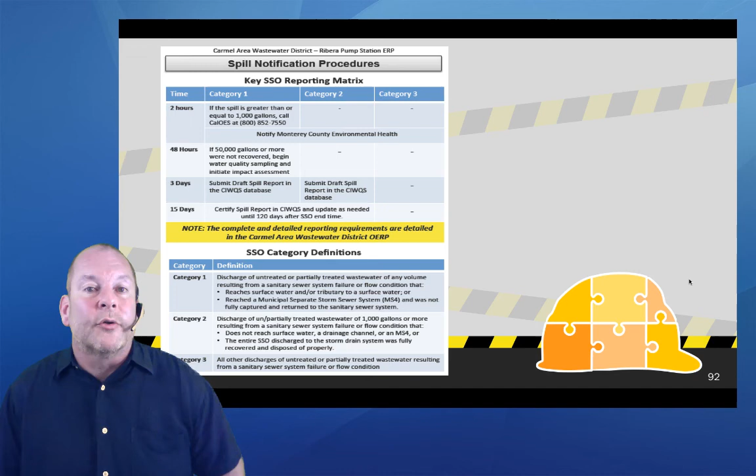And if you don't like the line diagrams, here's another way of presenting the same information. Now, if you do have a spill from a pump station, again, this is a reportable SSO, so perhaps some regulatory reporting information. And if you need to do a manual bypass, here's where that station is going to overflow, and here's laying out the bypass for that particular station.

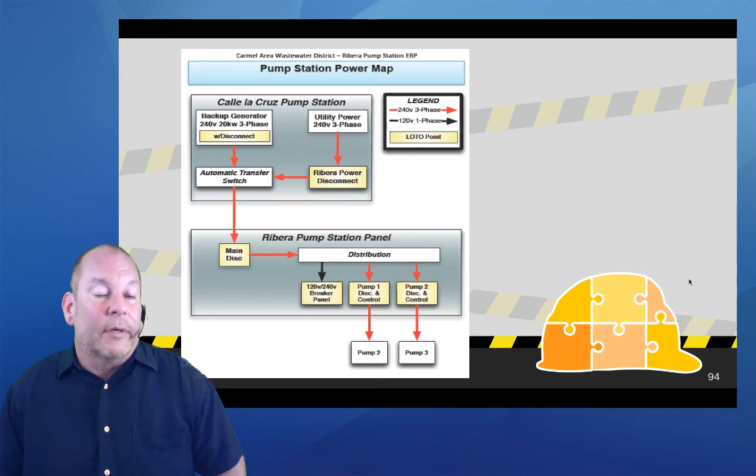The agency wanted some power maps as well. And they had a new SCADA system installed, so their employees weren't really familiar with all the error messages.

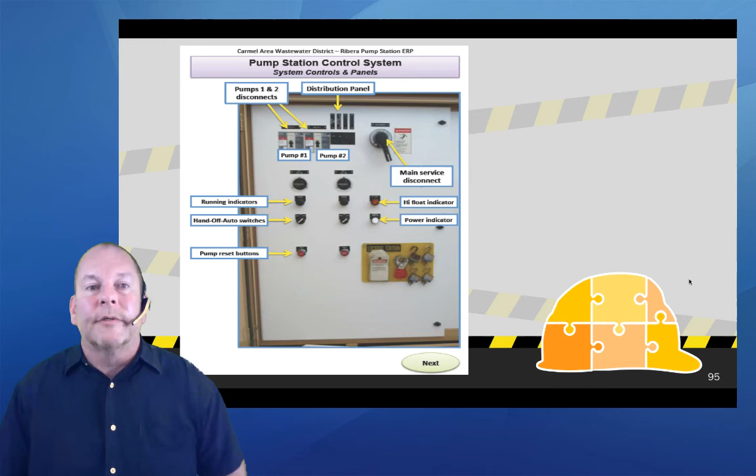So they wanted to make sure that not just the pump station controls, but also the SCADA screens had some examples for their employees to follow. All of this is shaving minutes off of our response. I don't have to guess what a particular error code means—it's right there in front of me.

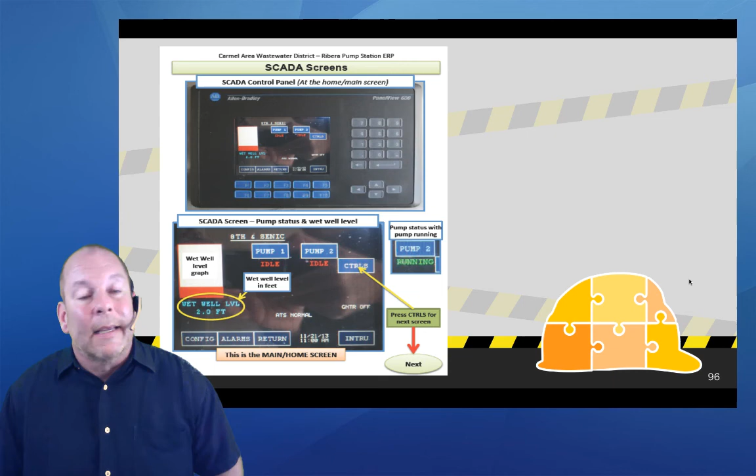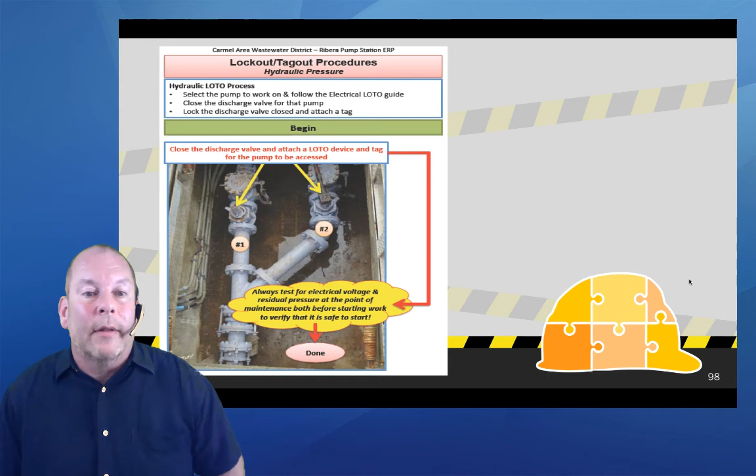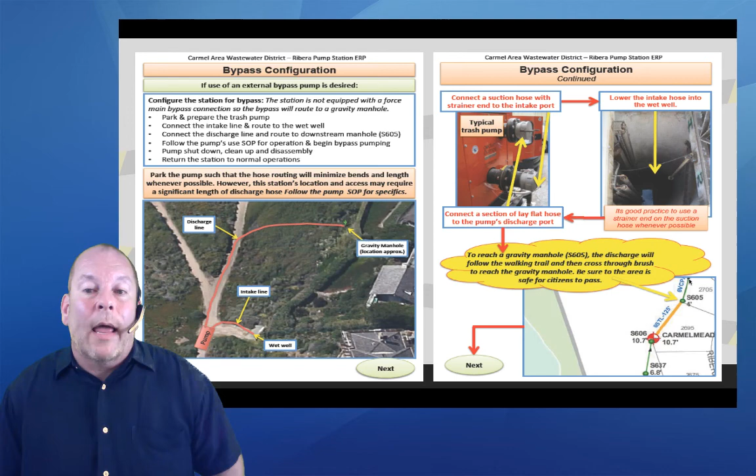Any key lockout tagout procedures, this is something we recommend including as well, because employee safety comes first. If you have any bypass or valving considerations, this is a good place for those too. You can see where they're going to manually bypass, the bypass configuration, the hose, the power needs, and pumping needs. That's an example of a pump station emergency response plan.

Your organization has all the information you need to put these things together, and in going through the process, any information you don't have will become readily apparent. But before we end, I'd like to give you a few other tips and tricks.

We talked about this, but you'd be surprised how amazingly effective it is in terms of saving time. If you need to pre-position a trailer, a pump, or a generator, identify exactly where you want it parked. This allows a single employee to position it correctly the first time without needing to get in and out of the truck.

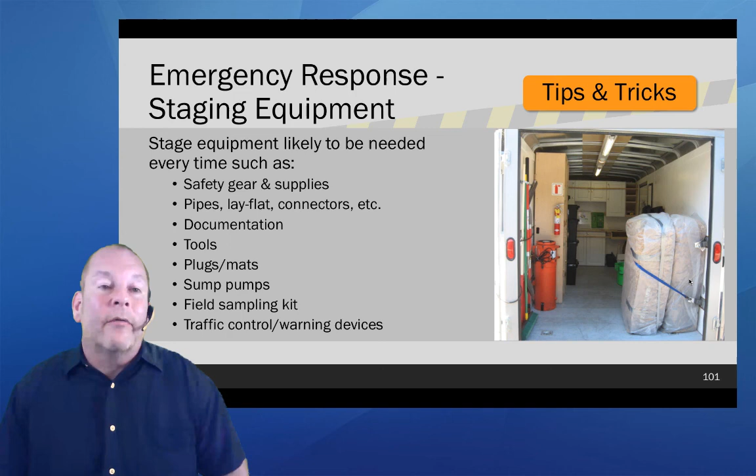And emergency response drills—I can't stress the importance of this enough. There's a city on the peninsula just south of San Francisco. If you're familiar with the Bay Area, you know our traffic isn't fun to get stuck in. This city is right off of 101, and in the morning hours, the commute running north into San Francisco is more like slower than molasses.

So they did a drill one day. All the staff was at their corp yard in the morning and said, okay, we're going to do a drill. This particular pump station, about 3 miles north, required taking 101 to get there because the surface streets would be clogged with morning commuters too. They said, let's go and measure our time. So staff made their way to this station through the traffic.

When they got there, they realized they had the wrong couplings for the pump. So they sent a staff member back to the corp yard, again in traffic, to get the right couplings. The couplings weren't where they were expected to be at the corp yard, so time was spent hunting them down. Once found, back in the truck, back into traffic, back to the pump station—about an hour and a half was lost. Had this been a real incident, that would have been another hour and a half that station would have been spilling.

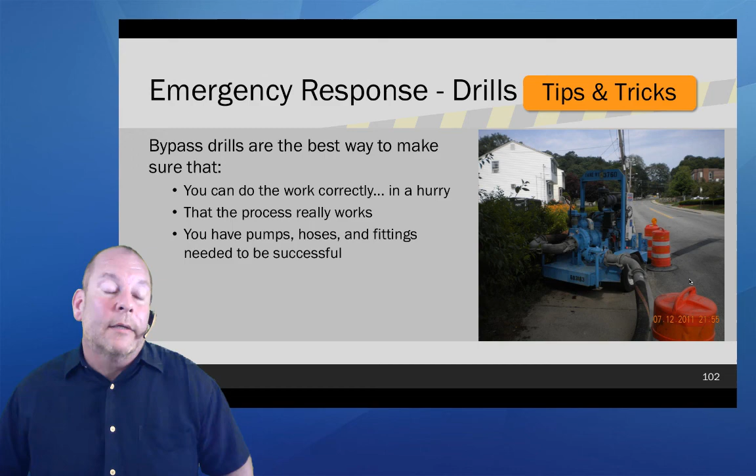So again, doing drills underscores where your problems are, and it gives you the opportunity to fix those ahead of time. It's going to make your response quicker, more professional, and make your organization look like the professional organization it is.

And the State Water Board would like to see you do drills as well. So has your agency developed standard emergency operating procedures for each asset in the event of a power or pumping failure? That's your pump station emergency response plan. They would like to see you do training and drills on those as well.